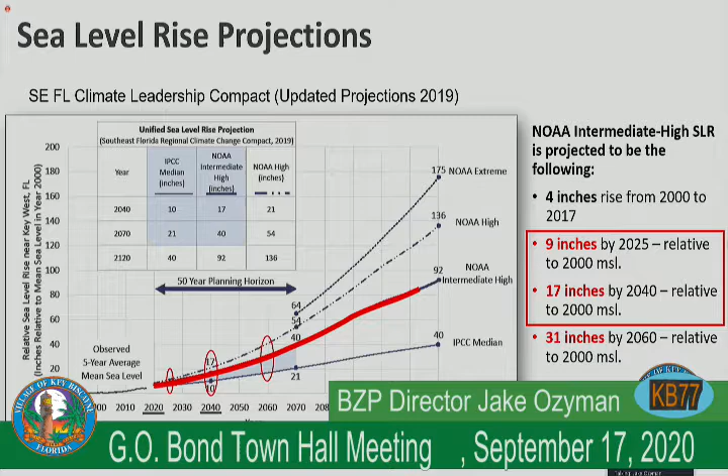Again, we open it up with this infamous graph. I understand we'll show this a number of times, but it's very important to analyze and understand what this represents - the sea level rise we've talked about over and over, and we'll continue to talk about it because it's happening.

Even this week, the anticipated king tides started yesterday on September 16, and will continue until the 22nd. Then we'll have another week October 14 to 21, then November 13 to 18, and December 13 to 15.

Anyone interested in seeing with their own eyes what's happening with sea level rise and water seeping in is invited to the closest community center garage to look at the wall and watch the water seeping in. Anybody living in condominiums can go down to their parking garage and see water coming out from cracks in the concrete floor.

Or if you want to go to some low-lying areas in single-family neighborhoods - Westwood Drive, West Heather Drive, West Mashta, Hampton Lane, and a number of streets like Allendale - you will see water coming out of catch basins and cracks in the asphalt roadway. So it is happening.

It's out there. Anybody who wants to witness it this week, especially tomorrow morning, we're going to have a high tide and king tide. So as staff, the village will document it, and we may be able to share it on our website for residents to see.

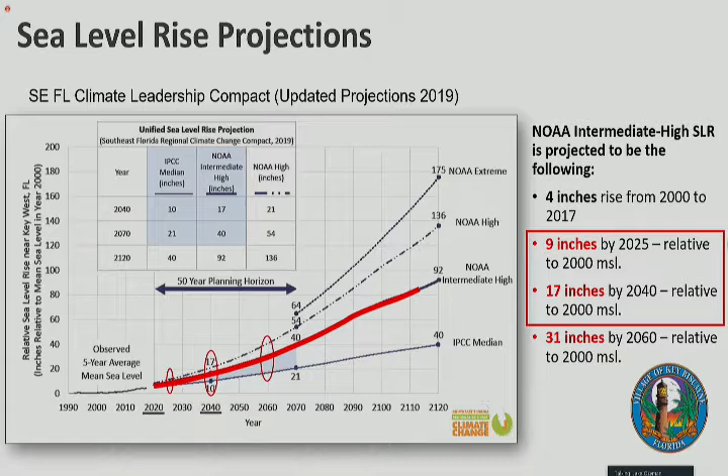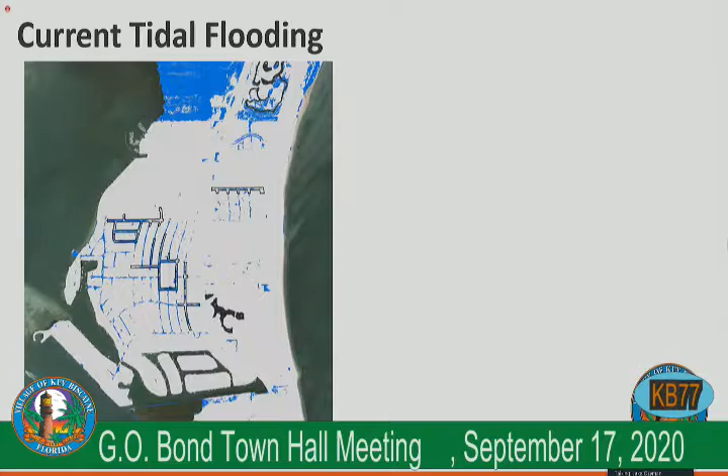Now, what that means for Key Biscayne - the map on your screen shows current tidal flooding. Basically all the blue areas experience tidal flooding at least once a year. You'll see the north side of Crandon is almost all blue, and the center of Key Biscayne, K8, is one of the worst areas in terms of flooding, with some flooding on the east side of Crandon Boulevard as well.

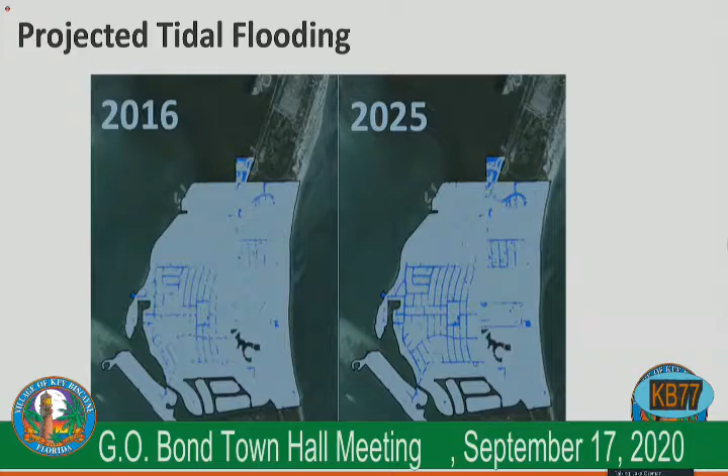Now these two side by side - 2016, which is 4 years ago, and then the 2025 projection. One important thing to note is there are no adaptation efforts included in this projection, so this is a do-nothing scenario. If you do nothing, in about 5 years you'll see this amount of flooding compared to 2016. And as you can tell, 2016 wasn't too long ago, and 2025 isn't too far out either.

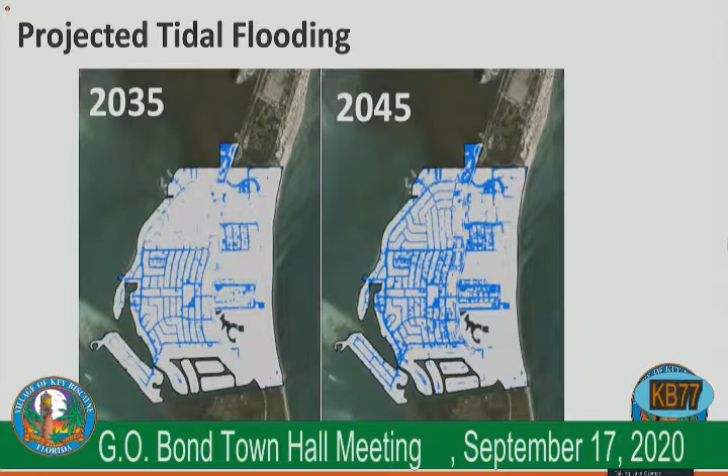Going to project the tidal flooding for 2035 and 2045, things are progressively getting worse. By 2045, I would say a good three-quarters of the village will be flooded.

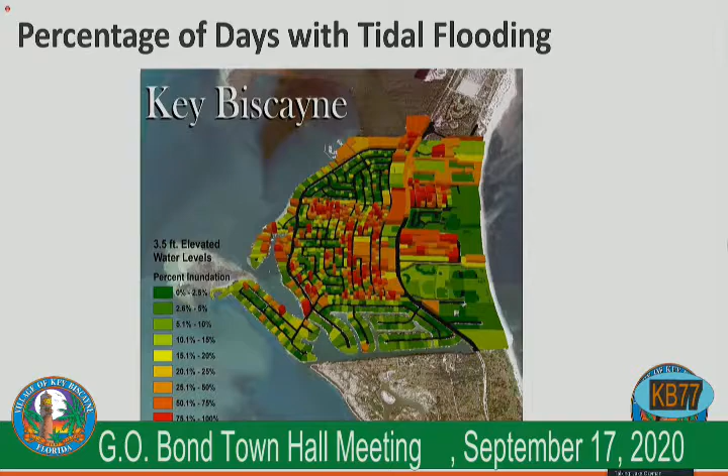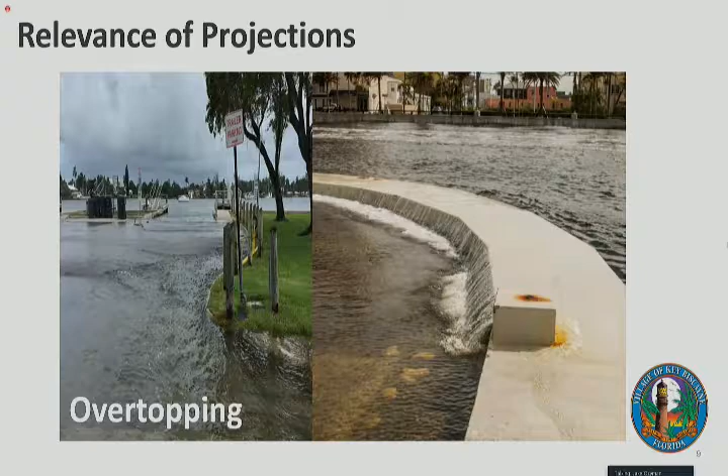And how is all this relevant? I want to show some pictures of how it affects daily life in South Florida. This is overtopping. Sea level can rise and overtop your seawall, and have water coming in, or it could come from openings from your canals and boat ramps and such.

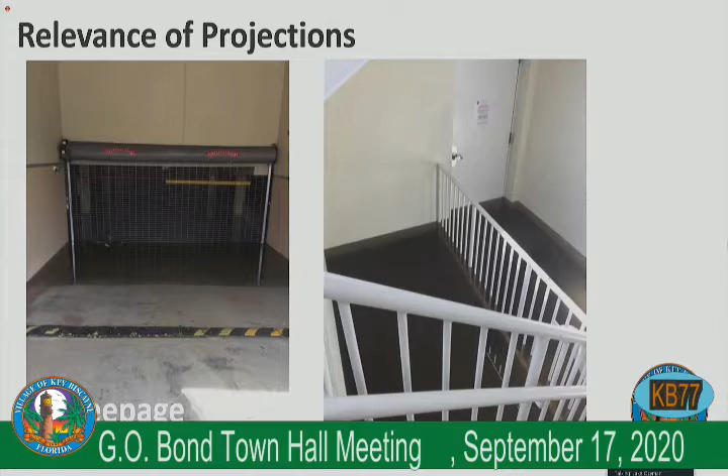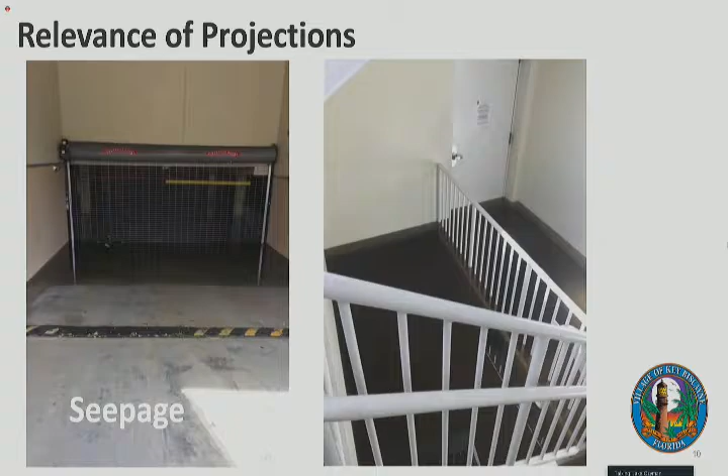This is our community center, seepage. You don't have to have a storm surge for the water to come in. That's how much water there is. Actually, this is after the hurricane, but I want to show this picture because if you go to the community center garage tomorrow morning, during the king tide, you will see the exact water level, water dripping out at that same location.

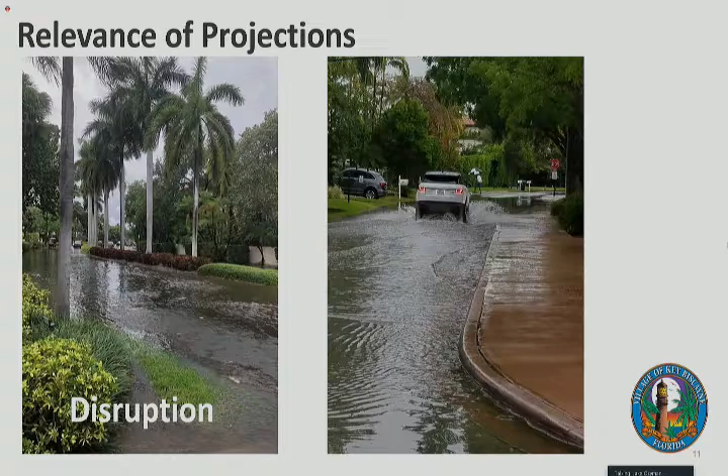Disruption, the rainwater - one is Ocean Lane Drive, the second one is also a Key Biscayne street. You could tell the amount of rainfall runoff, and it's not going anywhere because the water level is very high.

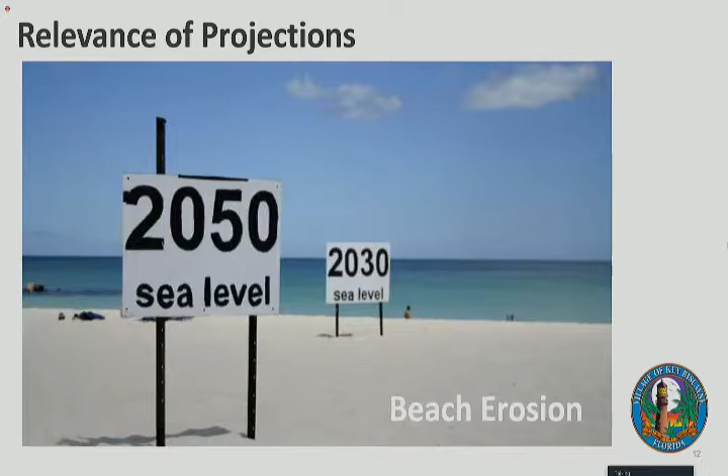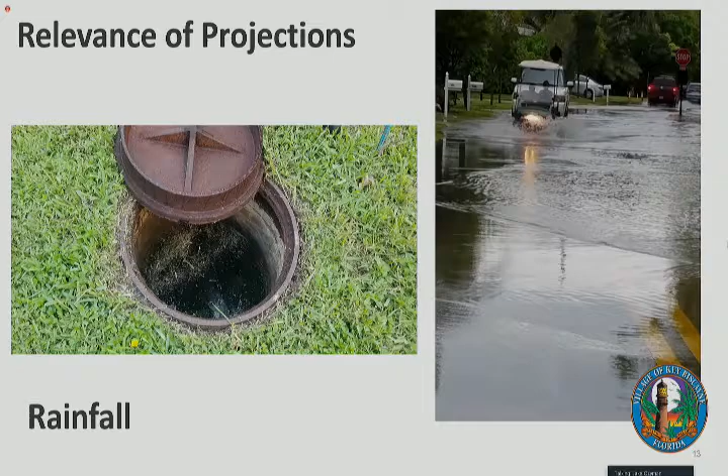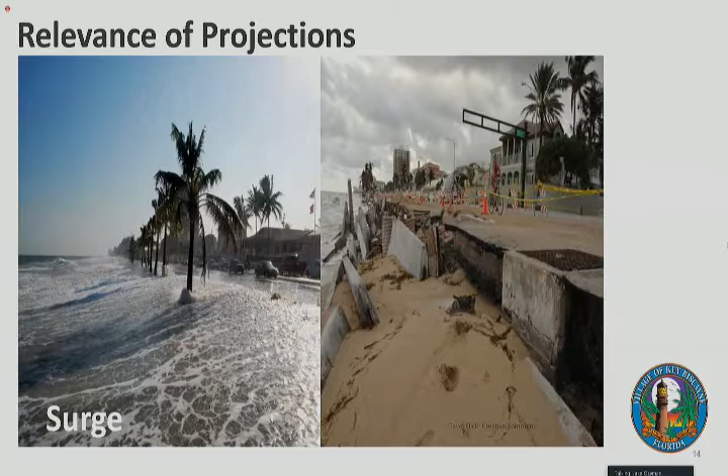And then now I'm going to touch a little bit on utility undergrounding and strengthening our infrastructure. Over the past decade, multiple hurricanes have impacted the South Florida area and caused widespread power outages. In September 2017, Hurricane Irma made landfall in the Florida Keys as a Cat 4, and Key Biscayne experienced a number of outages for a long period of time.

Similar to many other municipalities, Key Biscayne took charge, and we started investigating the feasibility of relocating overhead utilities, including power lines, communication lines, and telephone and cable, and burying them underground. We commonly refer to this as undergrounding.

How does the village get power? It starts at the power plant in Homestead, the FPL power plant. You have power transmission lines, and from the mainland, it goes underground and comes to the Key Biscayne substation right by Calusa Park. From that point, we have distribution feeders and primary laterals that connect and help power come from the substation all the way down to the transformer in the street.

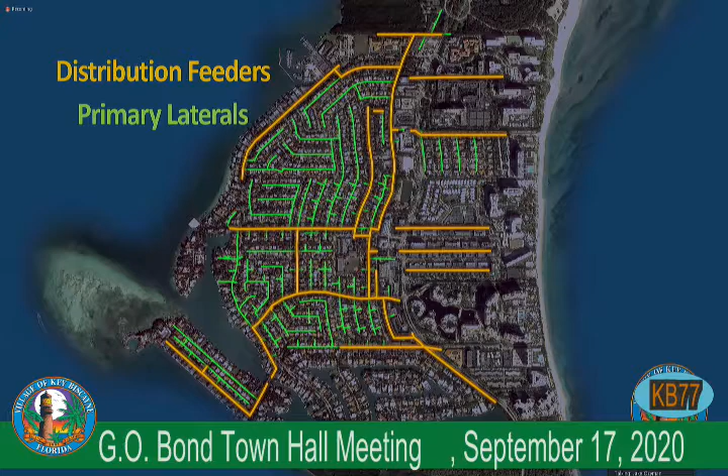Just to give some perspective, within the FPL grid in Key Biscayne, there are about 701 utility poles. There are 16 miles of overhead wires. There are 12 miles of underground wires. We have 343 transformer pads, overhead transformers. We have 211 at-grade pad transformers. We have 41 switches, and we have 13 capacitor banks.

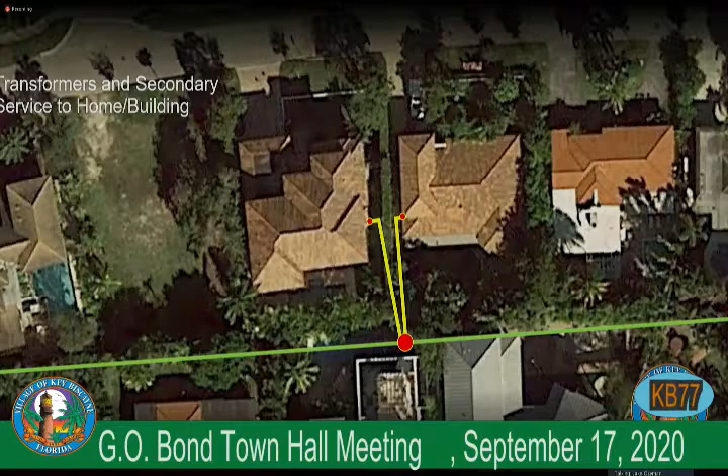And then in this image, you'll see the transformer in the street, and from that point, it goes to the meter, the electric meter at each home.

Impacts of undergrounding. There are a number of good impacts, and there are also some negatives. So let's start with the good ones.

Obviously, the biggest impact is safety. Utility undergrounding reduces the number of exposed power lines and reduces the number of potential downed power lines and poles.

It increases reliability. These are FPL statistics: 80% reduction in average number of interruptions per year, 80% reduction in average outage duration per year. 89% of overhead feeders and 24% of overhead laterals impacted by Hurricane Irma experienced an outage, while only 30% of underground feeders and 4% of underground laterals impacted by Hurricane Irma experienced an outage. So you can see there's a big gap between overhead and underground in terms of reliability.

It's also important to add that it provides additional aesthetics — you don't see ugly utility poles. Also, in Key Biscayne, it's very typical that utility lines run through an easement in the backyard, so property owners can claim back their easements and possibly build permanent structures if permitted by code. It also reduces or eliminates the need for FPL to come and trim the trees.

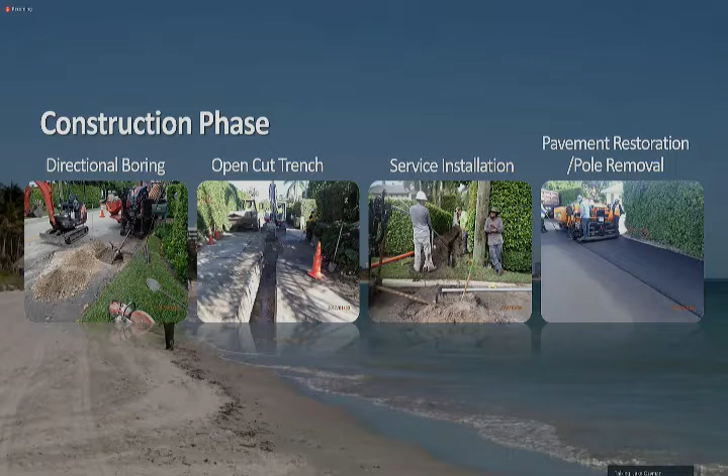Construction phase — I wanted to revisit this. There are a few different methods of doing this job. Number one, directional boring. It doesn't mean we have to cut open every street. There's a directional boring method where you have an entry pit and exit pit at both ends of the street and run the lines.

That's one way. Open cut trench is another, the most traditional way of doing it — it's cheaper, but causes more disruption. Then there's service installation, where a transformer pad is installed and a new service line runs from the street to the home, instead of coming from the backside of the house as it does now.

And we'll restore the pavement. Again, it depends on how this project is coupled with another project — we may take advantage of open cut trench, or directional boring, or a combination of both.

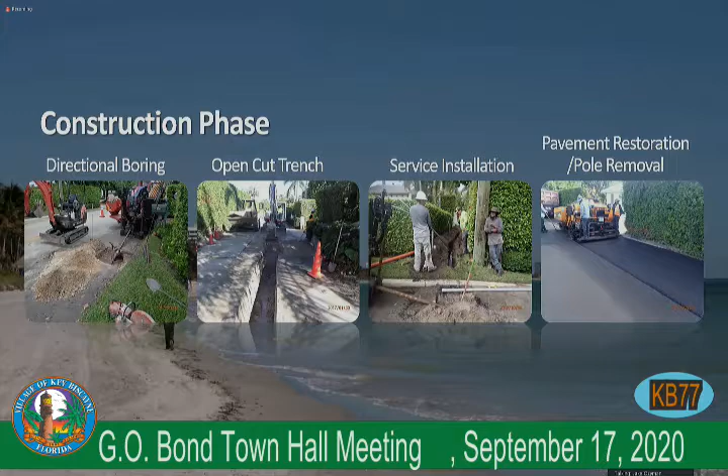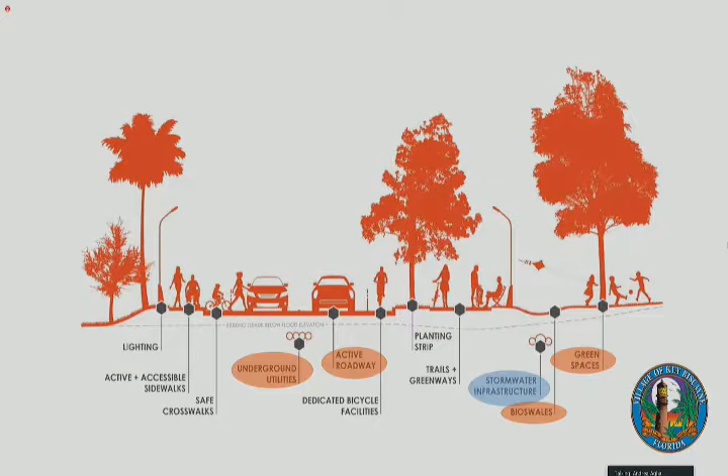This is the end of the undergrounding section, and I wanted to put this slide towards the end to illustrate how all this comes together, and I'll turn it back over to the village manager to wrap up. Thank you, Jake. So what we wanted to show here — this isn't Key Biscayne, it's just for illustrative purposes.

I've been getting a lot of feedback from the community and a lot of really good questions about what are the essential, life-saving resilience measures we are going to take, versus what are perhaps the nice-to-haves, among the elements of these proposed projects — which again have not been approved by council and will be, at some point, with specific cost estimates, project timelines, and actual engineered drawings. But what we wanted to show here was the concept of why, when you do an infrastructure project below ground, it's a really great opportunity when you're closing the road anyway.

We say buttoning up the road, to really think holistically about how the configuration of the roadway will impact not only our quality of life and the values of our homes, but more importantly, our resilience.

So kind of going left to right here, starting with lighting. I know there are some areas in the community that are very well lit, and some that are not. We've identified safety concerns for the areas that aren't well lit. But I can tell you from my personal experience, the first time I lived in a home with a very bright, very safe street light outside my bedroom window, it cast a shadow on my face. I understand how we need to find that balance of safety and introducing lighting that allows us to get out of our cars more and be walking throughout our community, having a safe, well-lit pathway to walk down sidewalks, perhaps crosswalks, and perhaps bike paths.

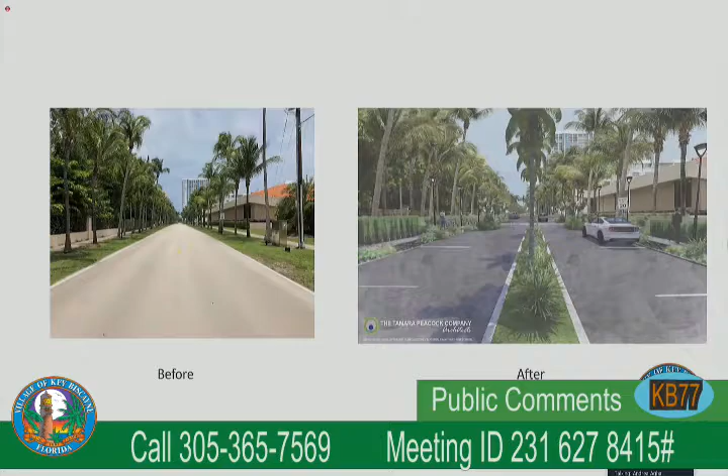I don't have the others readily available, but I'll share it. So those are some examples of what might look like on the surface for us. And keep in mind, below ground, we go back to that rendering we shared in the presentation that had the underground utilities under the crown of the road. And typically the stormwater infrastructure would be off to one side or the other.

Ms. Sanchez, if you're still on with us, hopefully that answers your question. And if not, additionally, the rendering is just to be able to conceptualize what a complete streets approach means, because I don't think a lot of people understand what complete streets really represents. There are a broad range of roadway improvement strategies that can be employed depending on the area of the island and the nature of the roadway, the characteristics of the roadway, the characteristics of the neighborhood, and the size of the right-of-ways and stuff like that. But this schematic just basically lays it all out there to be able to conceptualize how the various utilities and infrastructures interrelate.

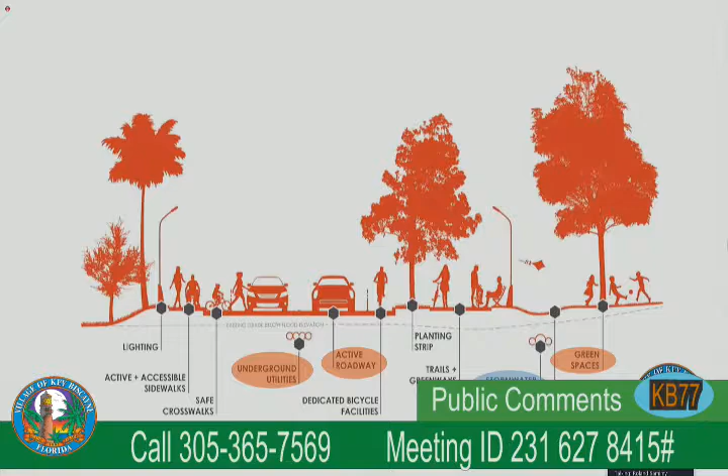Right. Thank you for that. Okay, Pete, anyone else have any questions or comments for us?